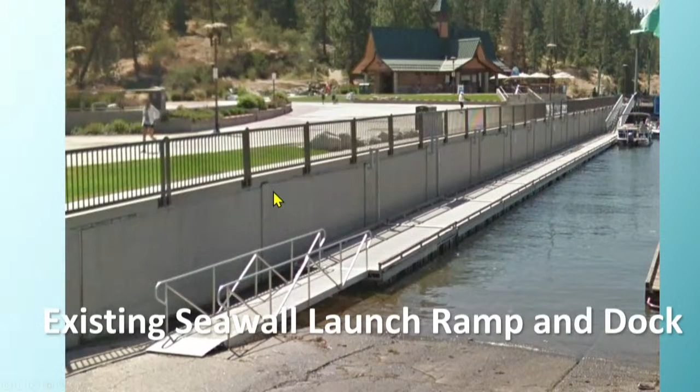The current condition of these other ramps look like this, and the reason they're listing is because the float logs on this side are saturated and they're sinking. So this is the new configuration of the docks, will look like the ones in the first picture. They'll look like that here. We're just looking for your approval to go ahead and work with Harrison Dock.

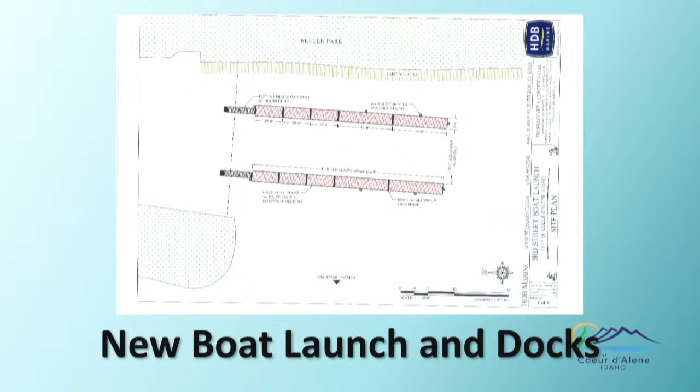Great. Madam Chair, we actually just saw this presentation, very well done, and we gave our approval to move forward seeking the bid, so I don't honestly have any further questions about this. It looks like you've done a good job on it.

We need the docks, so I would make a motion to approve the offered bid, I'll find the exact language here in a second. Second. Okay, any further discussion?

I just had one quick question, the timeline for this. I've given them 120 days, so from the point when we pull the trigger on it, it'll be done at the end of the summer. If we get some snow that gets in their way, I don't have a problem working with the contractor, they're a firm we work with a bunch, and so I trust them. We'll get it done hopefully by the end of this year. If they run into some hiccups, it may be completion of some work in the spring, but it'll be ready for next season's boating season.

Fantastic, thank you. So all those in favor? Aye. Opposed? Thank you, motion passes. And there has been a request by Councilman Gookin that this be added to the full agenda.

Item number 2 is approval of agreement with Simcoe Development Group for construction of a new water transmission main on Lakeview Heights, and we have Kyle Marine here. Thank you Council, I'm here requesting approval of the project from Simcoe Development for $100,240 for the installation of a new transmission main up a rather steep hillside over on Blackwell Island.

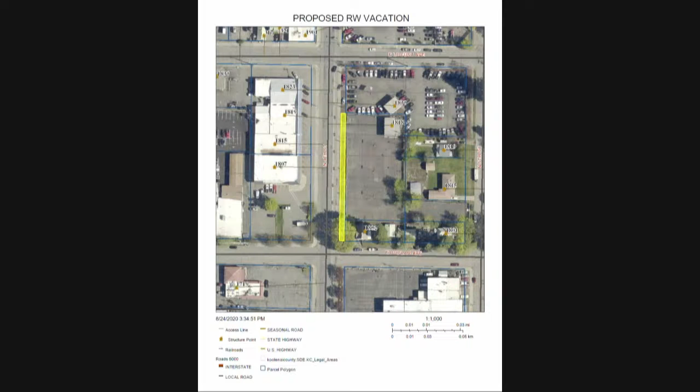Basically, the right-of-way is less than the exhibit shows to the south where the yellow is. There's a 10-foot difference. All utilities are existing and in place, and there is no foreseeable use for the additional right-of-way. The development review team was informed about this vacation. There was some concerns from the Park and Rec Department, and basically for me, I needed to know whether we needed to do a street tree easement. It doesn't sound like that might be an option.

So there might be some questions or comments from Bill that you might have. I'll just read the recommendation, then maybe Bill, you can come up. The recommendation to the Public Works Committee is to proceed with the vacation process as outlined in Idaho Code 50-1306 and recommends the setting of a public hearing for the item on November 3rd. So a couple council meetings away, we'll have if you guys approve that. So if you want to come up, Bill, and make some comments.

This got out a little faster than my Urban Forestry Committee was able to work through all the changes within Mr. Lawrence's design. But we spoke, and it's a bit odd. If we grant the vacation, there's really nothing that holds him to doing what we're asking. But he says to me on the phone that he will do what he's required by the Urban Forestry Committee.

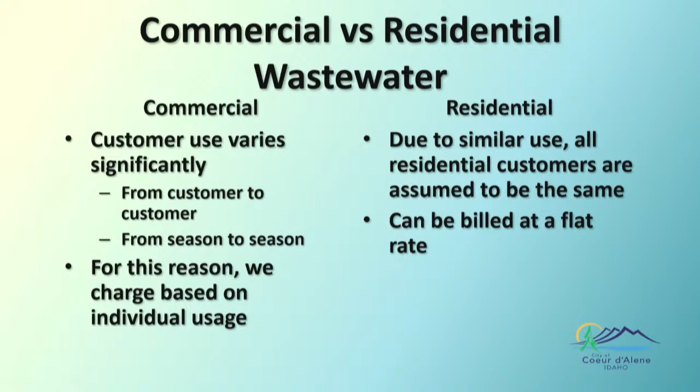Every gallon that comes in is a gallon they get charged wastewater for. Residences, because they're all quite similar in the grand scheme of things, can be billed at a flat rate. That flat rate accounts for the big jump you saw from January, 0 to 8,000 gallons, to July, up to 35,000 gallons, most of that being irrigation. It allows us to keep residents from paying for that irrigation.

Madam Chair? Well Mike, is it possible though for these commercial accounts that are very, very small to have the benefit of a flat rate? Unfortunately, no, because of that variance.

Commercial accounts use it differently. Between this commercial account and that commercial account, they can vary greatly, whether it's a hair salon or a burger joint, but also from season to season. So if I said a hair salon uses this much in the wintertime, I can't assume they use that much in the summertime too, because of that seasonal variance.

So in an ideal world, every gallon that went through that water meter, you would pay wastewater on, because that would be going down the drain. But in the real world, that's not what happens.

It's not like we're trying to get everybody to pay the same flat rate. We're really just trying to get people to pay for what goes down the drain. In fact, most cities are billed the same way we do, where every gallon you use is charged for wastewater, and then they offer usually an irrigation meter for those businesses that have irrigation.

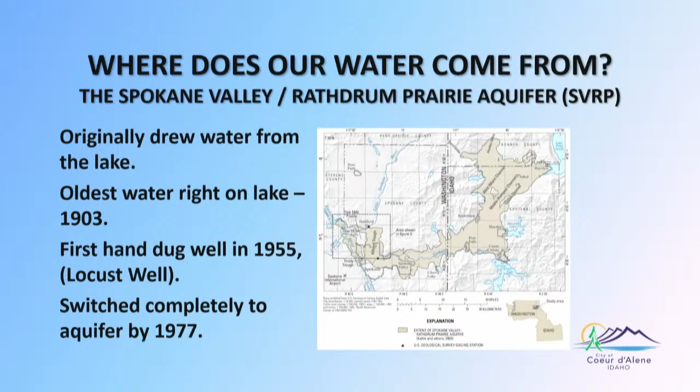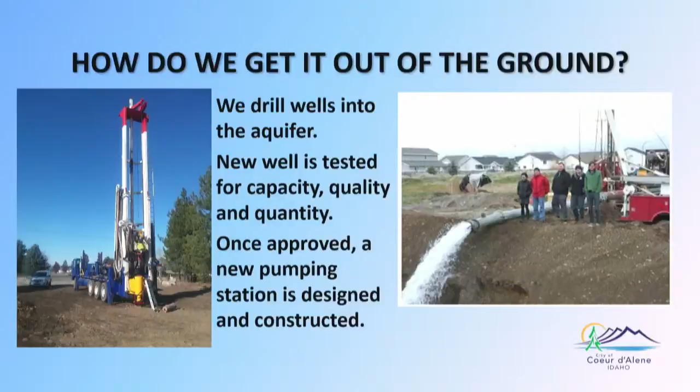So we drill wells to get the water from the aquifer. The new wells are always tested for capacity, water quality, and water quantity. We're very fortunate that our aquifer is very prolific and very pristine in water quality. Once they're approved, we build a new pumping station and put that system into service.

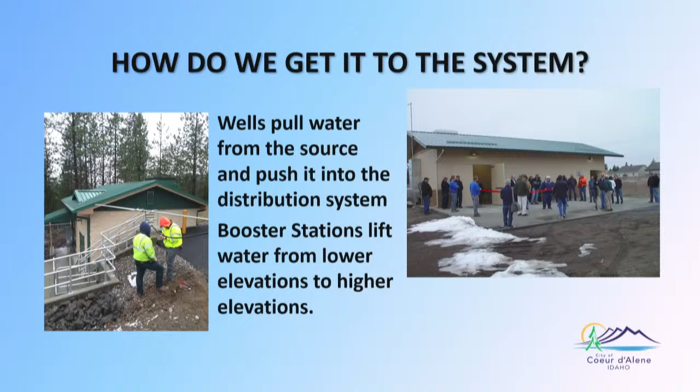So the wells pull water from the source and push it into the distribution system and ultimately into storage. And then we utilize booster stations to lift water from one lower elevation to a higher elevation or a higher zone. And we have 4 different zones in the city.

We utilize vertical line shaft turbine pumps with high horsepower motors, typically from 250 to 600 horsepower. These are babies compared to some of what Spokane has, but they're large for us. So the booster stations typically use centrifugal type pumps, usually 20 to 50 horsepower, and fairly small and easy to work with.

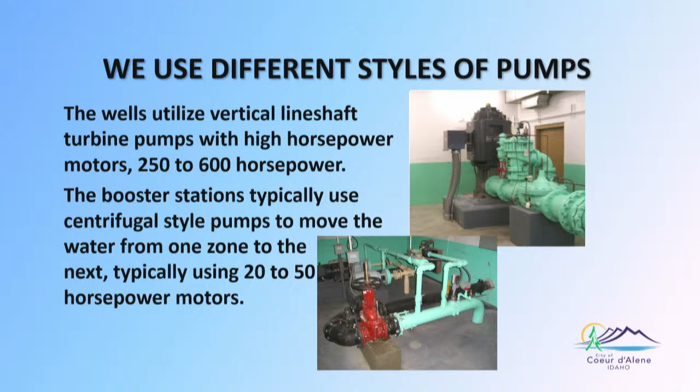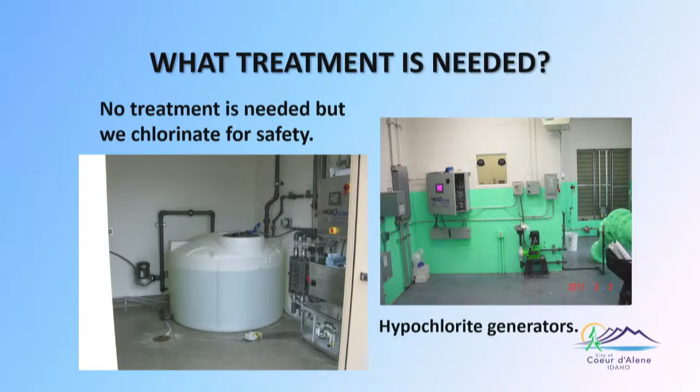Is treatment needed for the aquifer? No, this water is so clean and so pure that it really isn't needed, but we do it because of the size of our system. So 10 years ago we started switching from gas chlorine, which is very, very dangerous, to these ultra-safe on-site generators, which create a very low percentage chlorine bleach.

We utilize what's called a SCADA system, a supervisory control and data acquisition system. This system communicates with all of the wells, the reservoirs, the booster stations, and various systems throughout the city, as well as the control building. And we can remotely control the wells and the booster stations on site or from a computer.

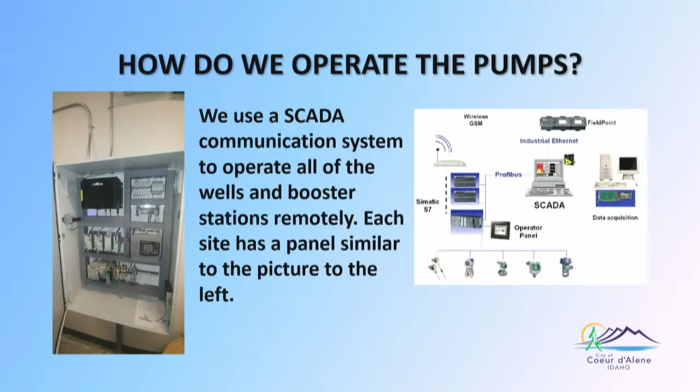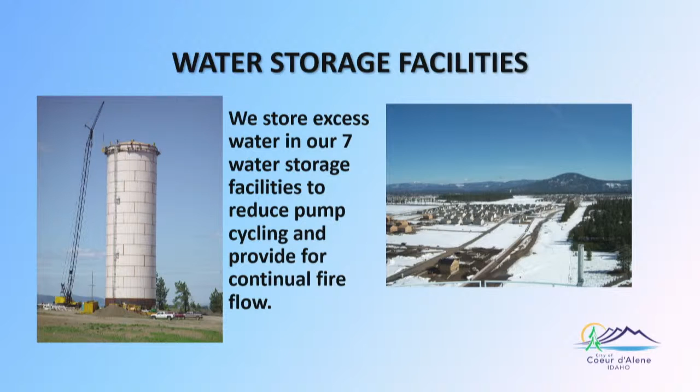We have 7 storage facilities throughout the city with a capacity of over 8 million gallons. This is the industrial standpipe being constructed. One interesting note on that, the top of that tank was built inside the tank, and it was floated on a cushion of air to the top where they welded it in place. I have a video that I could show if anybody's interested of them pushing that thing to the top. It was very interesting to watch. So the picture on the right is a view from the top of that tank when they started constructing Hawk's Nest, which is 160 feet tall.

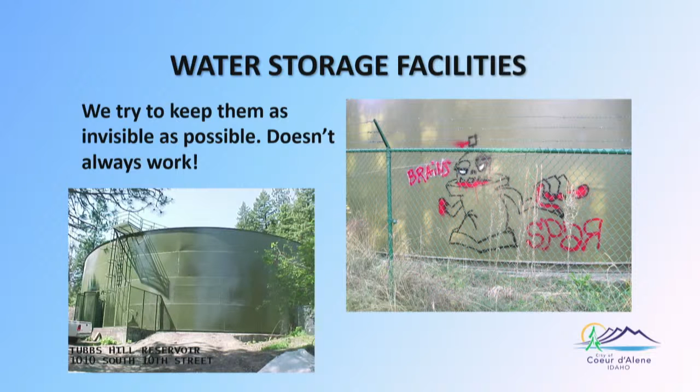We try to use paint schemes to make them as invisible as possible. Unfortunately, it doesn't always work. And this was the most politically correct one I could find. They really get nasty.

The water goes into about 305 miles of water mains ranging from 2-inch to 24-inch in size. We have over 100 miles of AC pipe still in the ground, from 4-inch to 24-inch, that we're working to replace, as well as steel and galvanized. The ductile iron C900 pipes have much longer lifespans. Some of the AC pipe has been in the ground 60 to 70 years, typically figured at 50 years. The ductile iron pipe lasts 100 years.

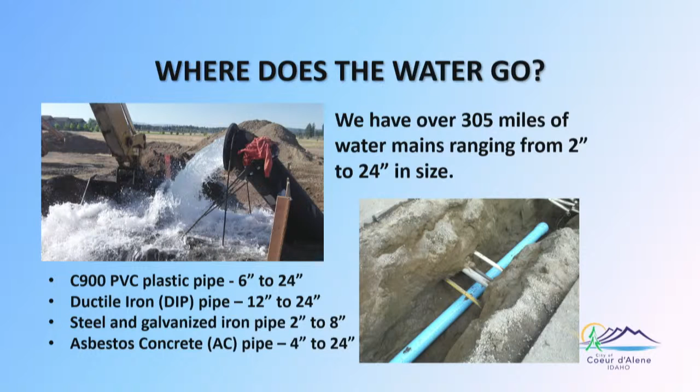All new main construction for development is done by contractors. No, this wasn't a California contractor. This is actually the end of Shattuck Lane. They raised the grade that much when they completed the project.

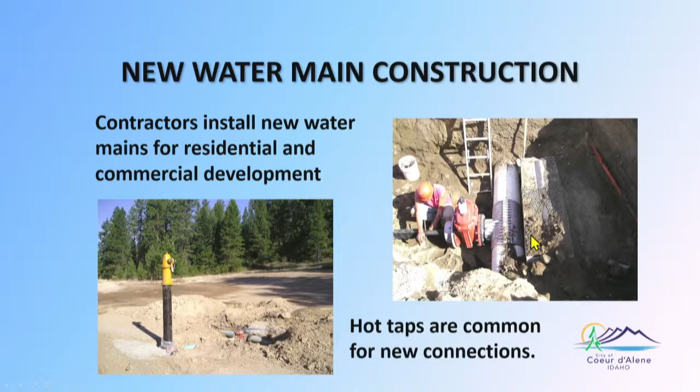All connections to existing mains are done with hot taps, meaning it's done with the water main live. A sealed unit drills through the wall of the pipe while the main is still in service. So all new taps are done that way, so we don't take a chance on depressurization or contamination of the main.

We do routine water quality sampling. These are our sample stations we're putting around the city. We have 47 so far, and we install them with new development, and wherever we replace an old service, we'll try to add one if we can. It's easier to get samples through these rather than through a hose bib on the side of a house, because you never know what they've used it for or what's going on inside. These draw directly off the main, so we get the best water quality sample.

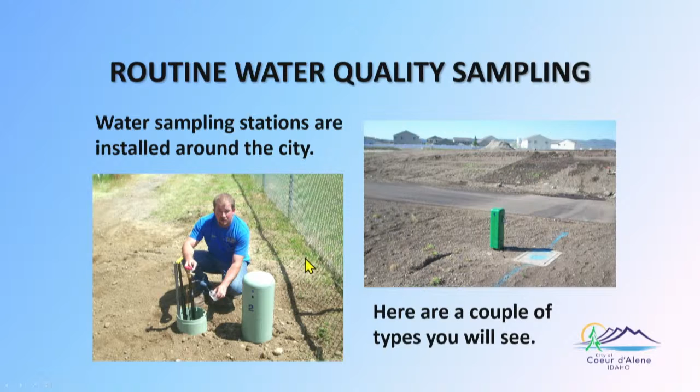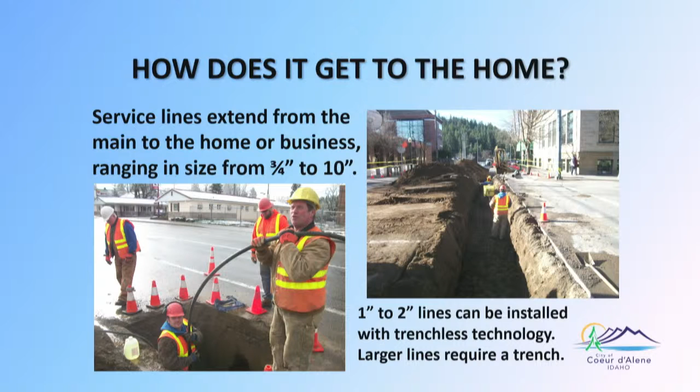3-inch and larger lines need open trenches. We did try a 6-inch fire line up on Northwest Boulevard. They were able to get it across, but we had some difficulty getting it to pass the pressure testing because of a different type of material.

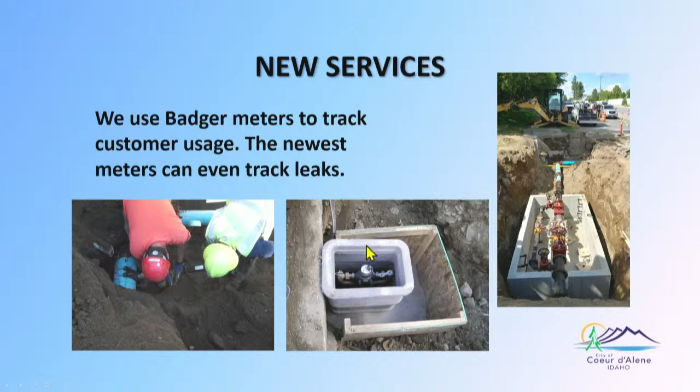We utilize Badger meters to track customer usage. The newest meters can even track leaks, and can detect if the meter runs backwards for some reason, such as overpressure on the customer side.

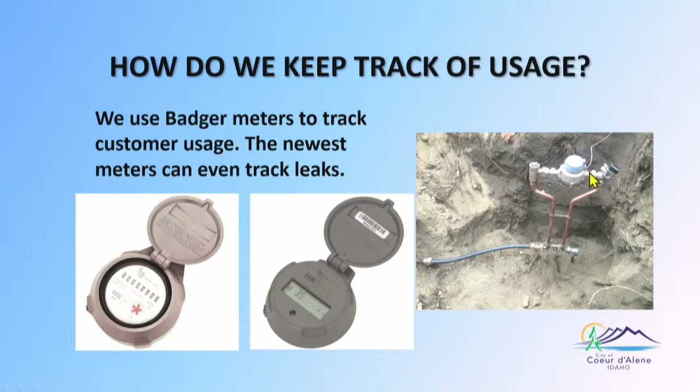This is the old register, an old mechanical register, and this is the new radio read. For this one, we had to stock registers for each size of meter, but this one you can actually program for each meter, so we only need to stock one meter register for all the different sizes. Here's your typical copper setter, meter, and radio read unit.

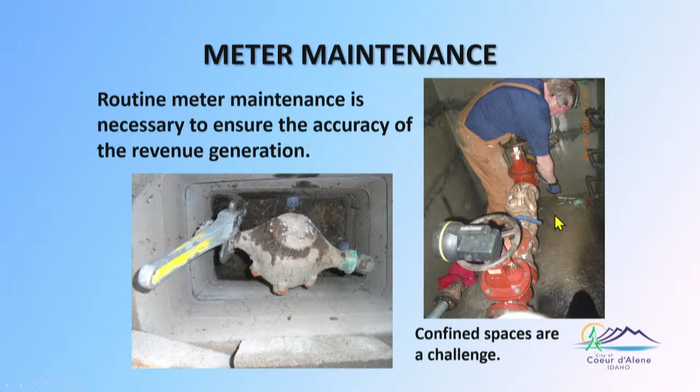We perform routine meter maintenance to ensure accuracy of revenue generation. This isn't just for the water department — as Mike pointed out, it's critical for wastewater too. We've been upgrading to compound meters on the larger sizes so they can register clear down to low flow. These will register down to a quarter gallon per minute, whereas older meters only register down to about 3 gallons per minute. That's a lot of low flow that wastewater was losing, as well as us for sewer revenue.

We change out about 2,000 meters annually, out of about 20,000 meters total in the system. The radio read batteries have about a 10-year lifespan, which is why we change them every 8 to 10 years. As you can see, we have some on hillsides and in various places that aren't always easy to locate or change. Some can be deep — typically 18 to 24 inches below ground, but we have some that are 4 feet down.

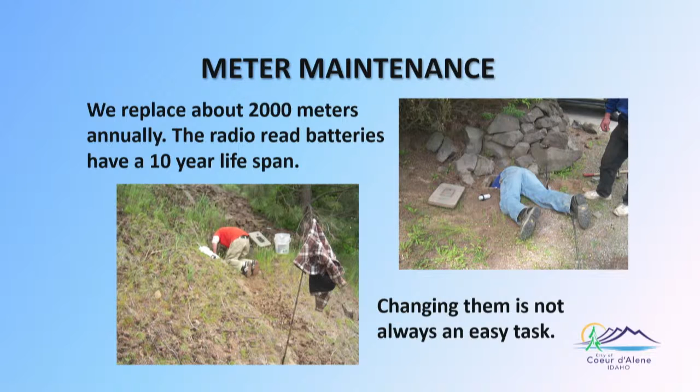Unfortunately, the meters and boxes are relatively ugly, so our customers do their very best to hide them. Here is a water meter encased inside a wall built in the house. We only have about 100 of these left in basements, and we're trying to get those all out. This one, you can't see it well, but the meter box lid is under about 6 inches of bark. We try to be respectful of their landscaping, but we still have to access them, and you see this one buried waist deep in a bush.

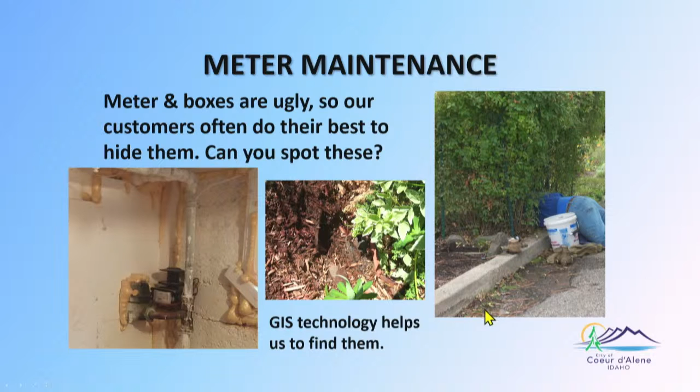Fortunately, our GIS technology has shot all of our meter boxes, so we know where they are through GIS mapping, and we can get to them within 3/4 of an inch. So if we lose one under landscaping, we can find it relatively easily.

Occasionally you have a curious customer that wants to take a peek. Some of our meter boxes are a little deep, so the guys really have to get into them to change those meters out.

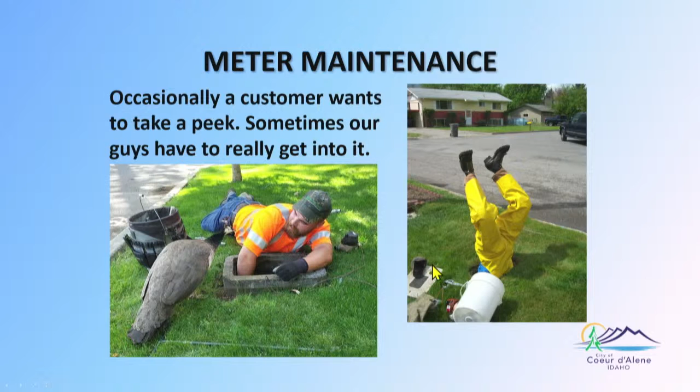We perform fire hydrant maintenance annually, so we hire part-time people. We used to have a contractor do it, but now we have part-time staff. They do about 400 a year over about 5 months.

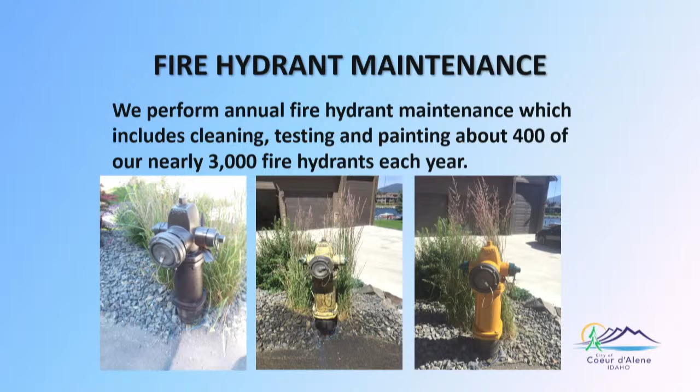Unfortunately, sometimes there are a few that are no longer repairable because there are no longer parts for them, so we have to replace them. We do probably a couple dozen of those a year, as well as adding fire hydrants when we're doing a water main replacement if we think they're necessary.

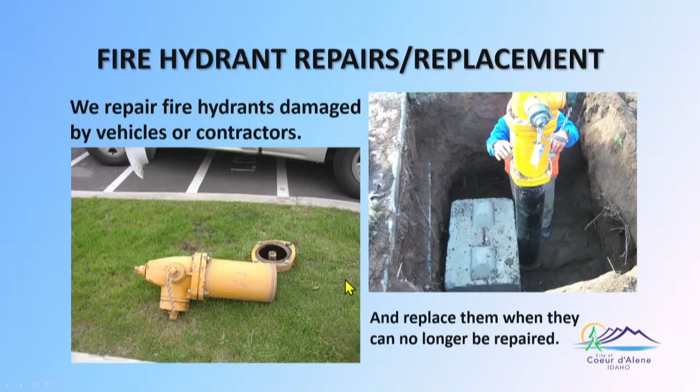So when that breaks off, there's a shaft going down, so the water's not going to gurgle up? Yep, unless for some reason the car parks on top of that shaft, no. They don't do like in the movies and shoot water up. Even the ones in warm climates are really designed so they don't do that—that's just a stunt for the movies.

Usually starting this time of year and moving into the winter, we'll do valve exercising. That means running the valves up and down with a hydraulic machine because they get corrosion and stuff on them. We go down and exercise those valves to make sure they all still function like they should. We have nearly 12,000 valves in the system, so it takes quite a bit of time.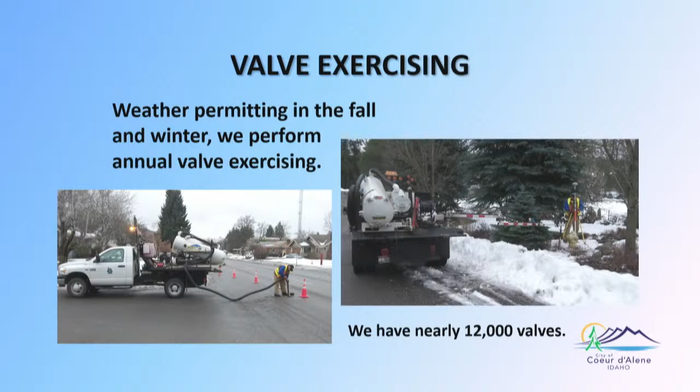Cross-connection control is one of those very important programs for protection of the public health. We try to explain that to the customer because it's a cost to them, but it is really critical to help protect the public water system.

We'll be looking at various different types of assemblies. We now track over 12,000 assemblies—that's nearly what Spokane tracks, so we've done a very good job on that. Once in a while, you get a little bit of a surprise when you open that box, though.

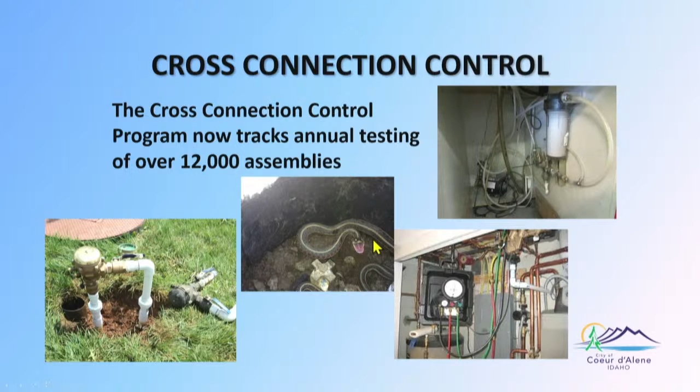We also do new infrastructure inspections. So when we have contractors putting in new mains, we're there watching what they do to make sure they meet our construction standards, as well as getting our own GPS coordinates.

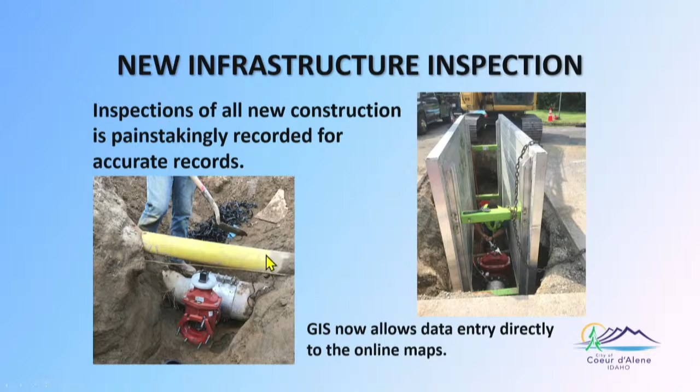Thanks to Debbie Frisbee, and a lot of hard work from her, we can actually now enter all this data right straight in the field, so we have almost instantaneous updates to our mapping system. We can also add pictures of this to the map so you can click on it, look and see what's there underground, so you know what you've got. It's really come a long way, and we're very fortunate she's been working with us on that.

Mother Nature likes to lend us a hand every once in a while with lightning and torrential rainfall. This is our standpipe. Last year, July 2nd, we took a lightning strike at that tower at Ramsey and fried our control system. Everything went haywire, and there's actually a YouTube video of the water cascading down the outside of that tank, so you can look that up and watch the Prairie Falls there.

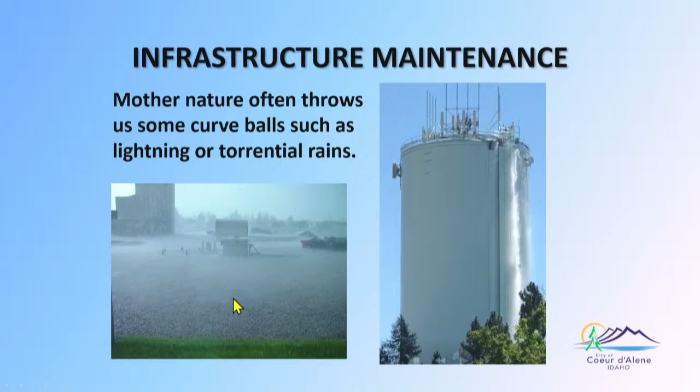With the torrential rainfalls, water leaks just seem to pop up in the streets everywhere. They don't realize it's storm drains overflowing, but we get all the calls. Eventually, unfortunately, infrastructure begins to fail as it ages, so we have leaks throughout the system many times a year.

This is a huge problem that's plaguing utilities nationwide, aging infrastructure. And it's not just water, it's not just wastewater, power, everything, streets. This is going to be an upcoming problem in the future. We try to stay ahead of it, so we try to do 1.5 to 2 miles of replacement every year.

The last couple of years, the Yardley piping that we've talked about, Yardley service lines, has given us a bit of a curveball. We've been replacing about 150 to 200 of those services a year, keeping ahead of the overlay projects. This one here was down on 11th Street, and this one was over on Blackwell, the 12-inch transmission main that goes across the marina parking lot.

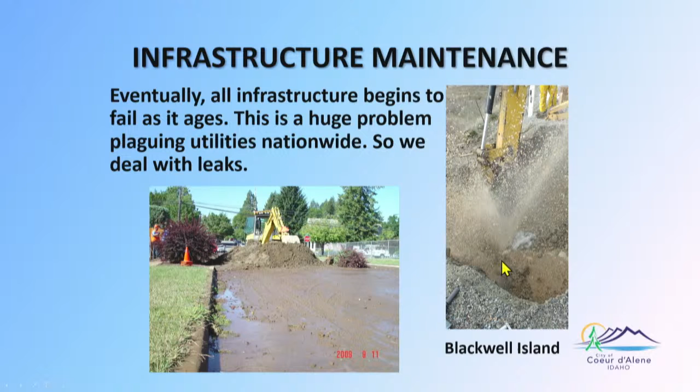Leaks can cause damage and be in difficult locations. This one happened in March 2012. There was a 3-foot section of wooden water main that somebody had forgotten and nobody knew was there, and it blew out that morning and washed out a block of asphalt. It took out the curb, and we were holding up a power pole.

This, fortunately, is just a light pole we were holding up. We had to rip out all of that asphalt, replace that main, and replace all the asphalt. Thanks to the street department, they went and cleaned up all the sand that washed clear down into the golf course. We had about 2 inches of sand wash down into a driveway that goes into Jerry Jager's place.

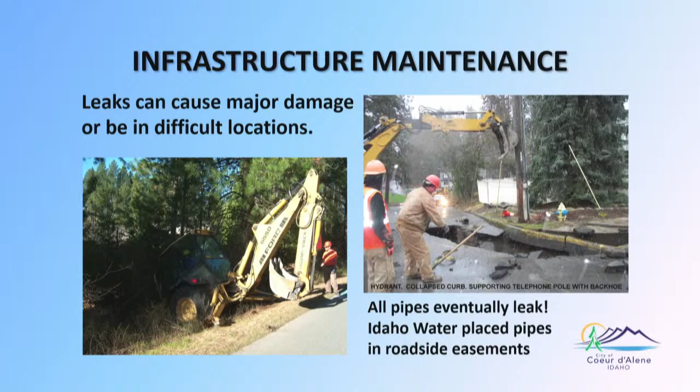This one here, Idaho Water used to put water mains off in easements instead of putting them in the roadways. This is down a 10-foot embankment. We've since replaced it. We had to skid the tractor down there and then pull it back up with chains to get it out of there. We no longer do that.

Our crew does infrastructure replacement. This is that same water main where you saw that tractor going down over the bank. We relocated it in the roadway and increased it in size from 4-inch to 12-inch. Our minimum size that we now allow is 8-inch, even though DEQ still allows 6-inch. 6-inch barely meets residential fire flow, so we've increased it to 8-inch.

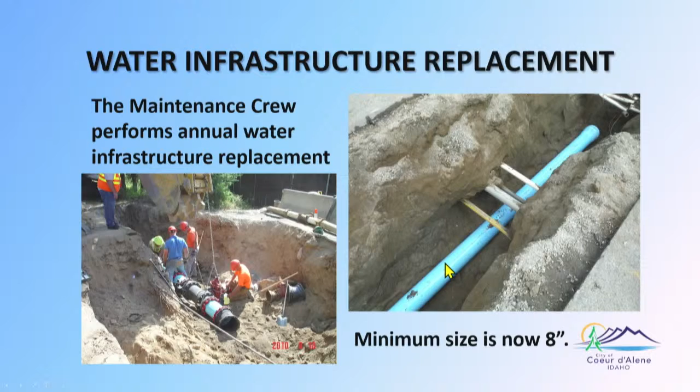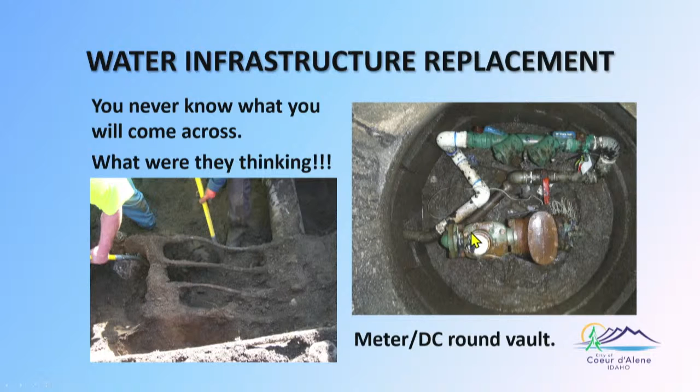Then we get the imaginative plumbers. This is an irrigation system for an assisted living down on Lincoln Way, and so they built the double check right in off of the meter in the meter box, so it's a little difficult to get in there and work on it. We don't allow that.

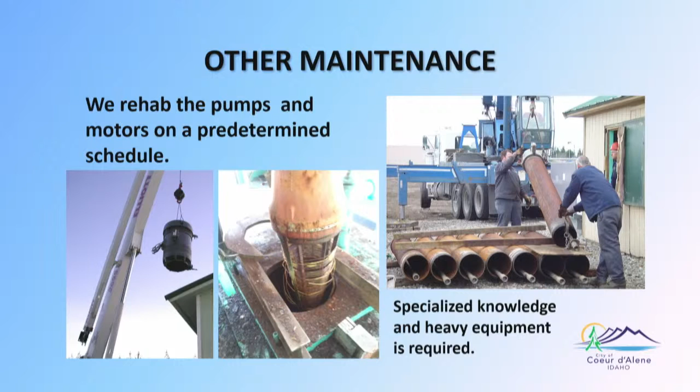We rehab our pumps every 10 years, and it takes some specialized knowledge and equipment. There are getting to be fewer of these contractors around, so we've only got about 3 or 4 to actually bid on them anymore, if they even bid. Most of them are so busy that they won't even bid.

We do maintenance of our storage facilities. This is going in and cleaning the Best Hill tank, so we had to drain the tank. The guys had to suit up and be sprayed down with hypochlorite, go in there, scrub and wash the bottom of the tank, spray it down, flush it out, retest the tank, and put it back in service. We do those about every 5 years.

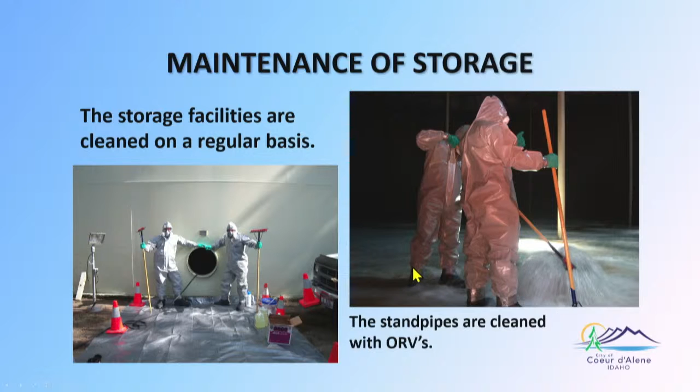The standpipes are so tall that we can't do that physically, so we use an ROV, a robotic vehicle, to go in there and inspect them while they're in service. They can actually clean them while in service as well, using a vacuum, and they can do camera inspection. It's a really neat process, and I have that on video as well.

We do our own fleet modifications. Here's that unit with the valve exercise unit. Our crew actually designed and put this thing together, and this comes off a truck that has an interchangeable bed system called Switch-n-Go. We have 5 different bodies that one truck can hook onto, so one truck can do the job of 5 different vehicles. But this unit, they put it together, they designed it. The manufacturer or supplier of the equipment came along, took some pictures of it, and now it's available as a package unit from the manufacturer.

So this is old Big Blue from the wastewater department, so we recycled that truck and turned it into a hydro excavator. We replaced the old hose reel on the front with what they call a contractor pack. It has hoses and nozzles to be able to cut the soil. We also converted it into a street washer, so it has nozzles on the front bumper that we can use to wash down the street while we're at it too.

It's an interesting color you chose. That's just the color, well, that was wastewater's choice, so that's just the way we got it. But it's become one of our key pieces of equipment. It's very nice for digging around utilities because you're not doing it with a shovel or a backhoe, so it's very safe to dig around utilities with. And the guys did a fabulous job outfitting it.

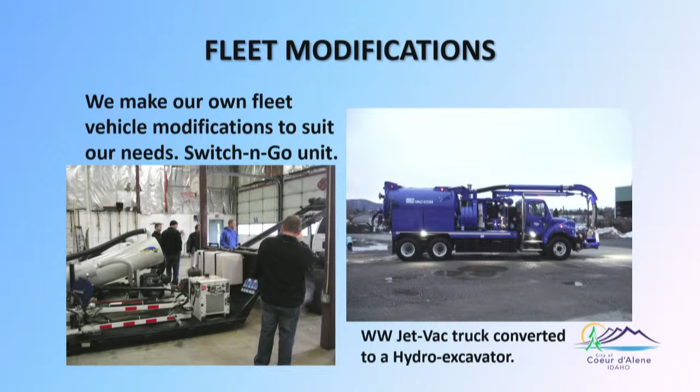We train annually. We have to maintain our licenses. We're required to have operator licenses to touch any of the valves or any of the equipment within the city. We must maintain a minimum of 0.6 CEUs for our regular operator licenses. If we have backflow or anything like that, it requires additional training, so we attend regular classes as well as put some on ourselves.

This one here is the annual service truck rodeo over in Spokane. Here's that piece of equipment again that we're demonstrating for some of the other attendees, and so we get to show off some of our equipment that we build. Here's a fire hydrant class where we had a distributor come in and demonstrate for us, as well as neighboring water systems, on repairs and maintenance for fire hydrants.

Occasionally we get to show off a little bit. So a contractor like CAT or an equipment provider will put on a rodeo, so if we get time, we go and the guys get to show their skills here. Here's one where they're taking volleyballs off the tops of cones and dumping them in a garbage can, stacking a set of tires. This one, you're actually knocking tennis balls off the top of cones. You couldn't knock the cones down, or that was a penalty, so we had to be careful with that.

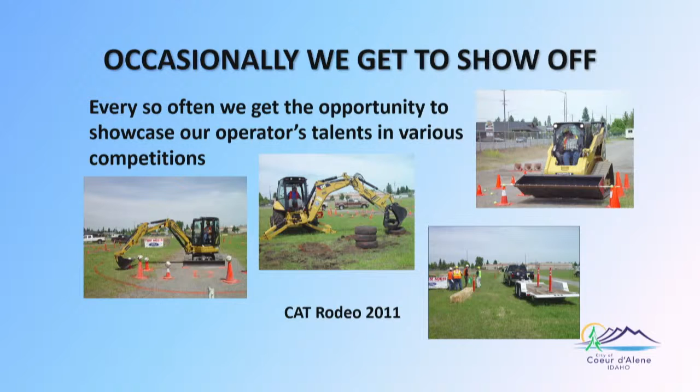This one here, if it shows up, was a 100-yard dash backwards with a trailer through a series of cones, and I actually did it in 32 seconds. Could never do that again. But one of my guys did it in 25, so he had to show me up. Yeah, we get to have a little bit of fun once in a while.

A few recent accomplishments: the Best Hill Booster Station, we finished in 2017. When originally bid, it was about $300,000 over budget, so we went in and did the actual piping ourselves and knocked about $275,000 off the subsequent bid. So that's what we saved to get it done, and I'm pretty proud of the guys, they did a fabulous job on it. Unfortunately, because of the time of year we had to get it done, it was in January, so the guys were dealing with snow and frigid weather and still did a fabulous job on it.

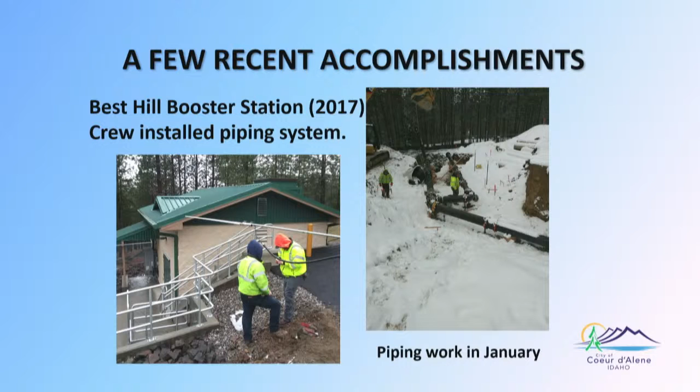The Huetter well just got drilled this spring down to 363 feet. Test pumped at 4,200 GPM, good water quality, and we're in the design phase of the pump house now.

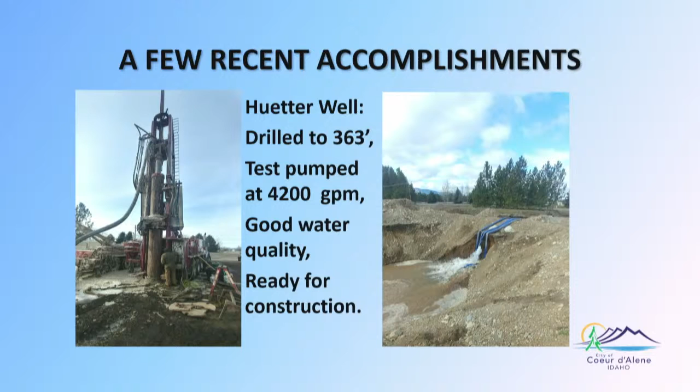Last year we did the Fernan Hill 12-inch transmission main. We took a 12-inch main from the Elm Street booster station over to 23rd Street to replace an old 6-inch main, to help stabilize pressures up on Fernan Hill. This summer seemed to help quite a bit, we got very little complaints compared to what we normally get.

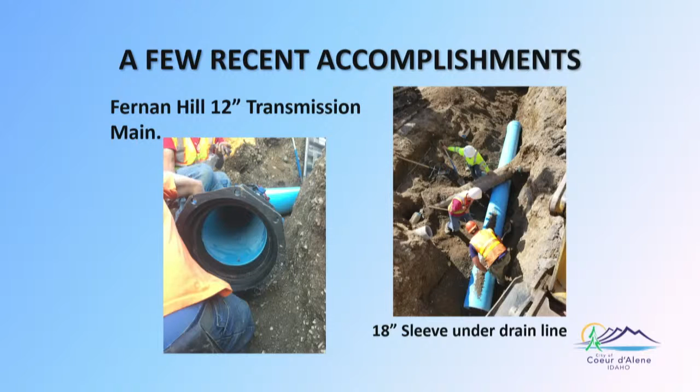So that's just the first phase of a 3-phase project that Kyle's been working on there. The second phase he did this fall, where he converted 4 different mains over to the general zone, and that took about 50 houses off of that high zone. So it's relieving the load on the Stanley Hill booster station tank. Ultimately, when the next phase is done next year, we've got to replace a section of water main, and that'll take another 10 or so off that system. So we'll have about 60 homes off of that tank, reducing that load.

Of course, we just finished the water facility. We're trying to figure out how to get the council members in there safely to do a grand opening, but this presented a lot of challenges this year, so I'm still trying to figure out a safe way to do it for you folks.

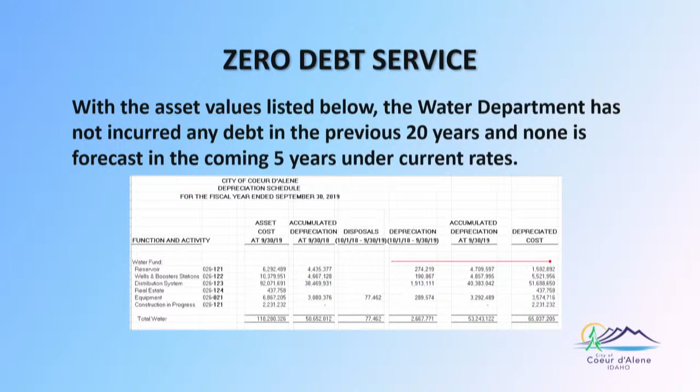One thing I wanted to point out, zero debt service for this department. We have not incurred any debt in the past 20 years, and we do not forecast any in the coming 5 years under our current plan. So we're pretty proud of that. That's unheard of in our industry.

Upcoming projects: Hutter Well construction, we talked about that one. They're getting ready to construct the Trails transmission main from the new Hutter Well site to the industrial standpipe at Industrial Park. Working on the design for the Atlas and Centennial Trail transmission main, that's phase 2 of that project. We're currently advertising for pre-qualification of the contractors there.

Kyle brought you the Blackwell transmission main. We are not forecasting any growth there, or desiring any growth there. It's a replacement of what's existing with adequate facilities to provide fire flow. There's a little bit of growth there that's already guaranteed a right to, but we're not promoting any future growth there. We just want to supply what's there.

Canfield and Fernan tank sites. Canfield, we're working on trying to get an agreement with the property owner. We're still searching for the tank site on Fernan, so that's still ongoing. And I just talked about the Elm Street switchover, which Kyle has done a fabulous job on, so I can't thank him enough for that.

With that, myself and our former superintendents, thank you for joining us. Unfortunately, Ralph passed away last year, and so we dedicated a well to him. He'd been with us, between Idaho Water and the city, since 1968 to 1992. He put a lot of time in there. So the system is based off of what he really started. So thank you.